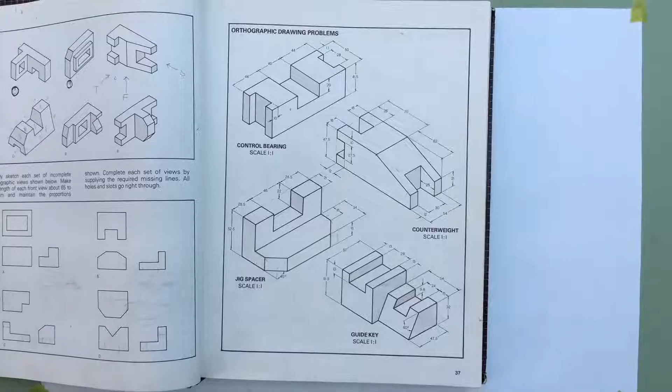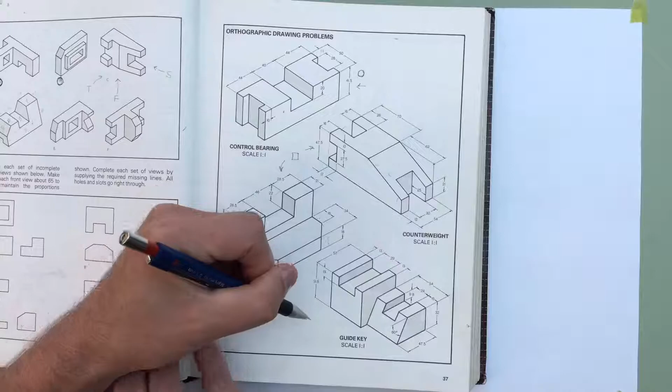Alrighty, so for those of you who ski, we have a few different options here for you. We've got the green circle, which is this guy right here, then the blue square for these ones, and then the black diamond one right here. The reason this one's a black diamond is because of this sloping face, which is going to make drawing it a little tougher. So if you want to stay in noob-friendly zones, you can choose these three objects at the top of the page.

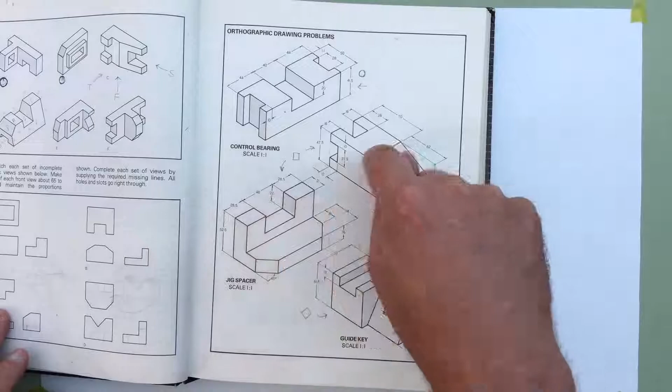But because we like drawing that's kind of sendy, we're going to do the black diamond on YouTube.

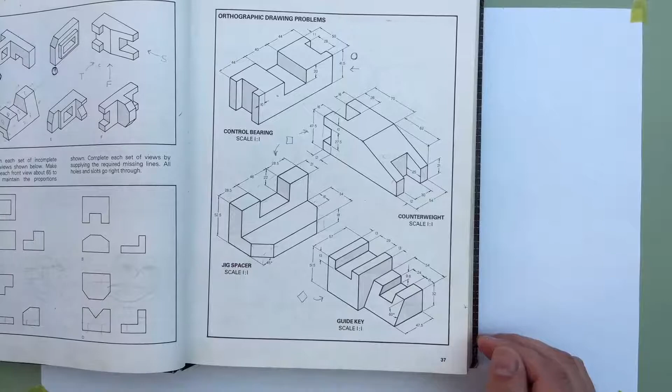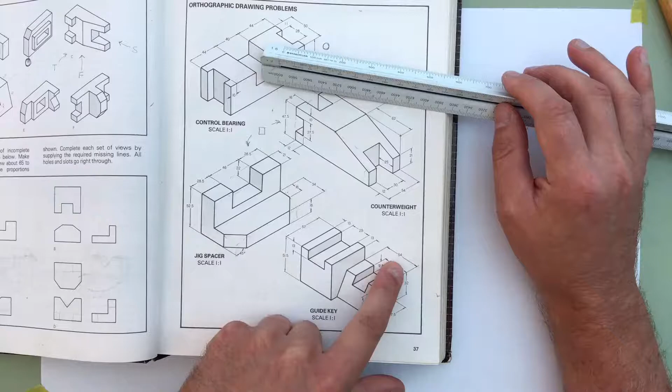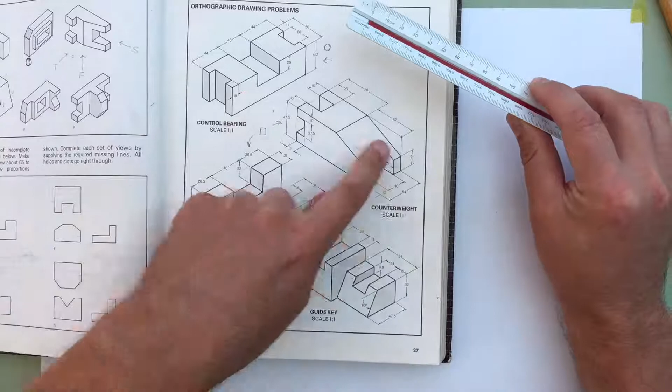And so here they're suggesting that's the scale you're going to use. So for these particular problems, we're just going to be drawing them at 1 to 1, we're not going to worry about scaling. But if I was laying this out on a sheet and didn't have guidance on what scale to use, I'd go to my scale, figure out how long the object is, and then see how that's going to fit on my sheet and how it's going to look.

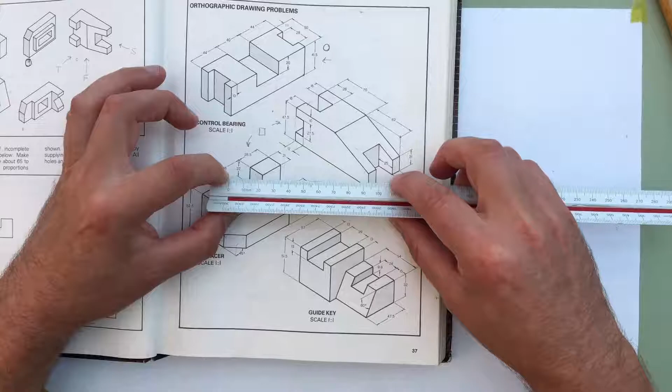So the next thing we've got to do is figure out what's going to be the top view, the front view, and the side.

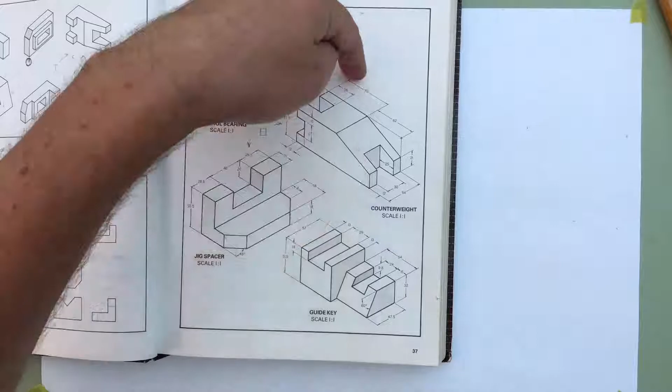So for all of these objects here, they've been organized so that the top view is kind of a gimme. In all of them, the top view is just going to be looking down onto these objects from above. And it's going to be the same for this one.

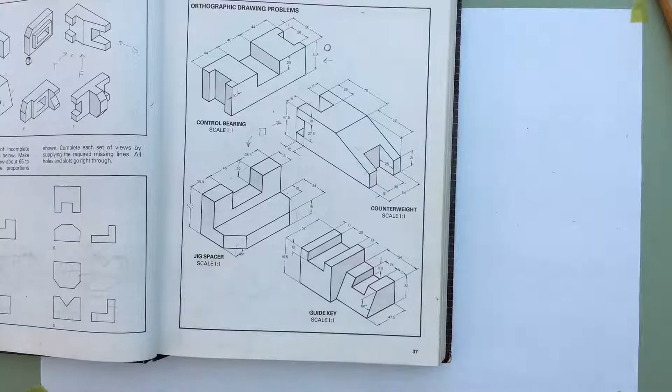Now the question is, when we think of projecting it, how do we want to lay this out on the sheet so that it's going to be easy to lay out? So I'm just going to very roughly sketch it out here before I go on to paper so we can just talk about this.

Okay, so I'm just going to draw this block very simplistically in the top view. So there's our block. It's got this sloping face at the front, which is going to create this kind of an effect.

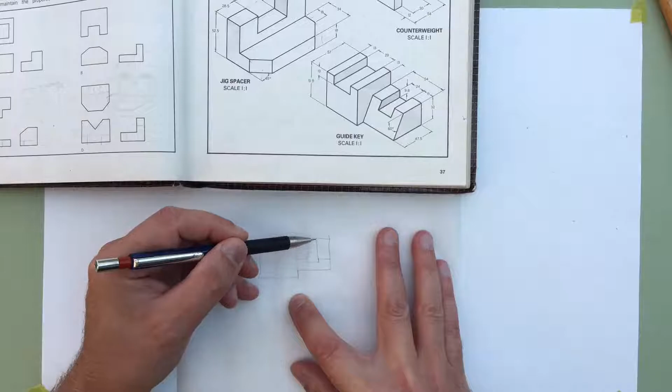So you can see the orientation that I've got it in here, that this is going to be my top orientation. And so as I draw the rest of this stuff, I've got to draw the view looking in this direction and the view looking in that direction.

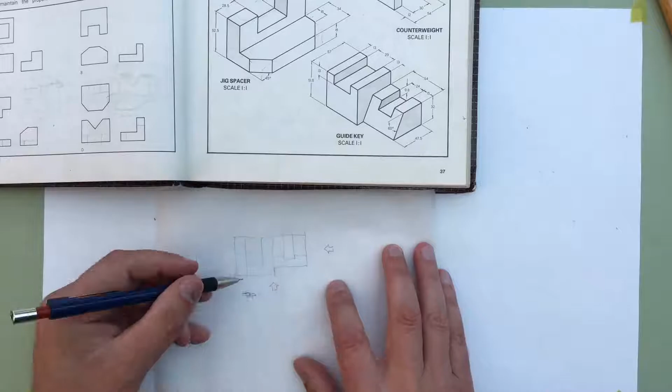So when I lay this out on the sheet, I'm going to start projecting some lines downwards until I get to draw what I need here at the bottom for the front view. I'm just going to draw some faint construction lines across so that I can start blocking out how this thing gets drawn for my front view. Then I'll come back in and do my object lines.

And this aspect of the drawing is pretty straightforward. Where it gets a little bit more difficult, you see with this sloping face that we see from the side—from the front view and from the top view, it's not immediately obvious that we have a sloped face to deal with.

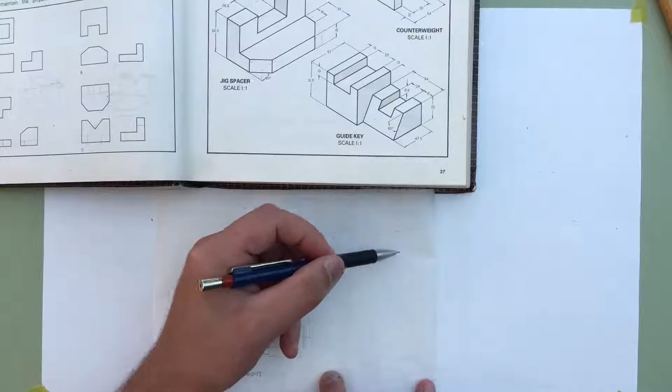So now what happens is we draw a 45-degree line from the corner here, and you can just pick a point here where that 45-degree line is drawn. And then you're going to start bringing these lines across and then bringing them down so that when we do the side view, all of our geometries are going to line up in two directions. So you'll be able to bring these lines across and then you'll start blocking this thing out.

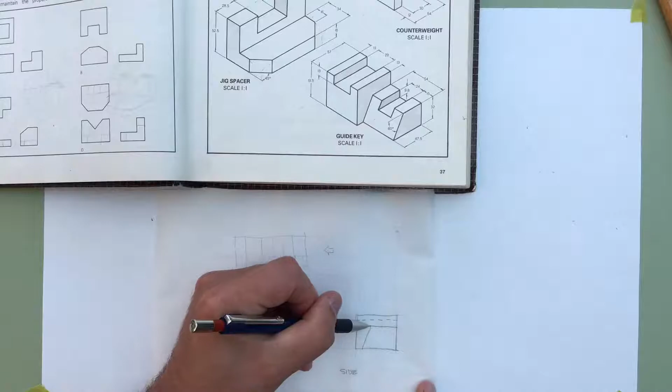So this taller piece here, when you see it from the side, we're going to see the dashed line coming across. And we're going to see the sloping face, which is going to start here and go back. And we're going to see the dashed line in here as well.

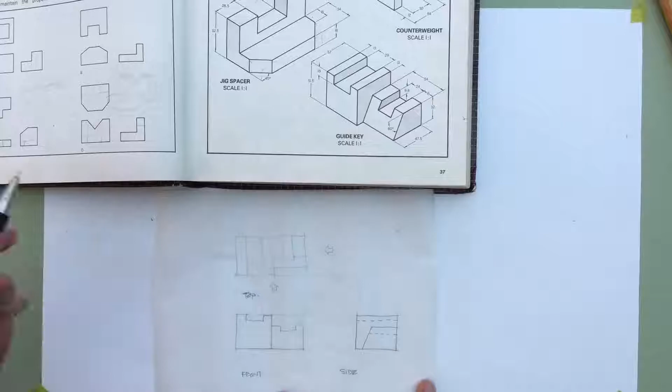Now, where people get confused on this particular block is when they're drawing this face. So what's actually easy to do is you can block out the top view first and just not worry about drawing this little bit of the sloping face yet, because it can be hard to figure out exactly where it is. So this is interesting.

This is how you can use other views to help you draw your top view. So normally you'd sort out your top view first, but these drawings are specifically ambiguous with how some of the stuff is going to be sorted out.

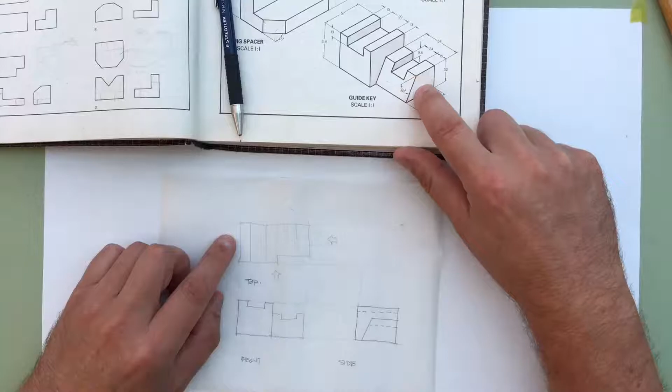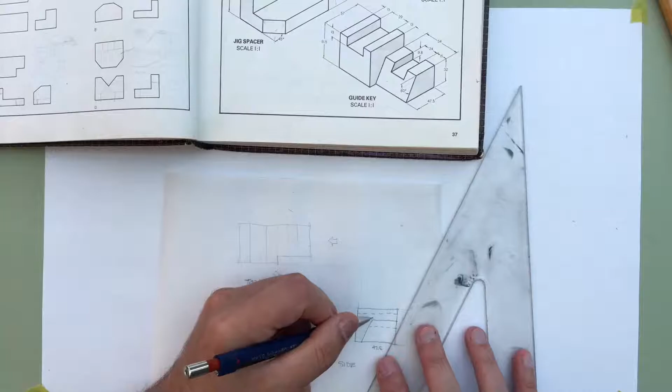So with a 60-degree angle, you know that you can come to the 47.5 millimeter mark here. And from here, you can use your set square and draw that 60-degree angle starting from this point and going up to draw that sloping face. So that's actually pretty straightforward for the side view.

But now, for where this slot comes through, we can draw these projection lines up to the 45 and then back over so that we know where the slot comes out on this sloping face. So now we know our slot comes to there.

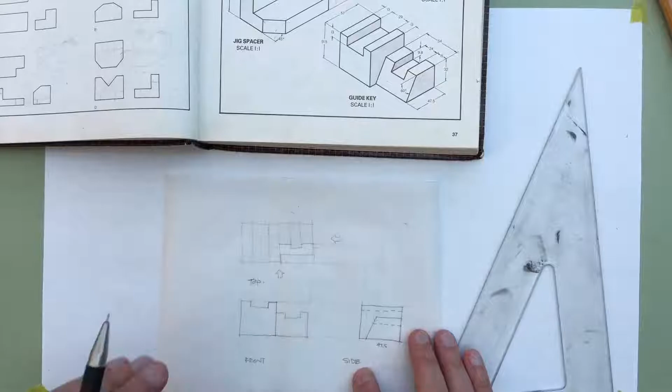Now for the top corner, we can project that line up and then take it over. And now we know where the top corner is going to show up in our top view—meaning that point right there. So this is how the top, front, and side are going to work out for this guide key.

So what I'm going to start doing is blocking it out on paper. And I'm not going to talk too much. If you guys ask questions, I'll answer them. But you can kind of see how I'm going to lay it out on paper, and you folks can follow along.

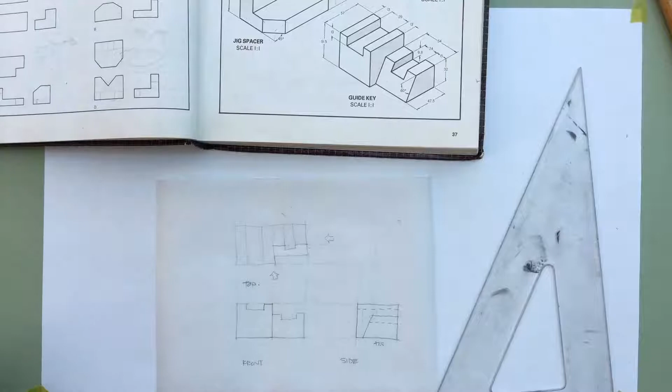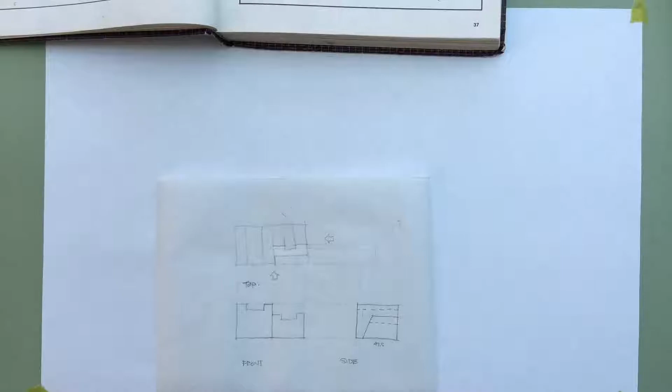So if you want to, if you guys want to start with the guide key, you can, just because that's the one that I'll be drawing, and we can all take the black diamond run together. Now we don't need the compass, of course, for this, so that's good.

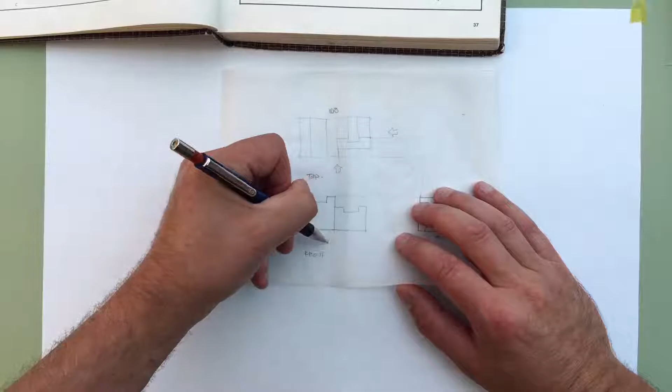So I'm just putting some of the overall dimensions on my sketch here before I get started. I'm creating a little roadmap for myself on trace paper before I get started.

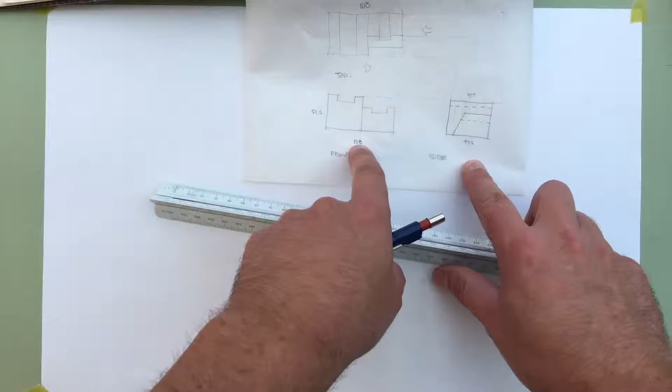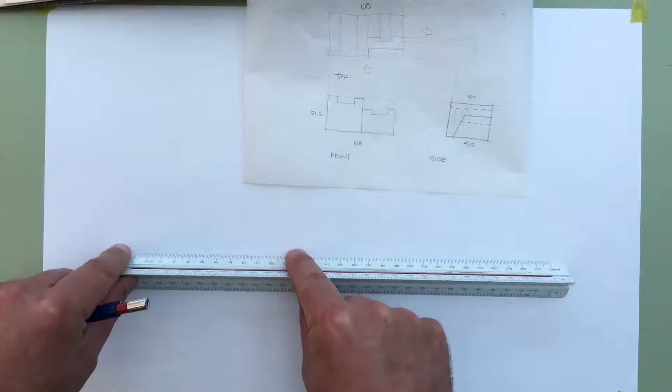Okay, so when I look at beginning to lay out the sheet now, I'm going to start thinking about how much room I'm going to be taking on the sheet. So I've got 108 mils, about 48 mils here. I want to start laying out my sheet so that I've got enough space for the title block at the bottom and so on. So I'm just going to lay my ruler out here. There's 110 there, and I need another 50. So I can start just about anywhere here and I'll be in good shape.

Whoa, my paper is totally not straight on the page.

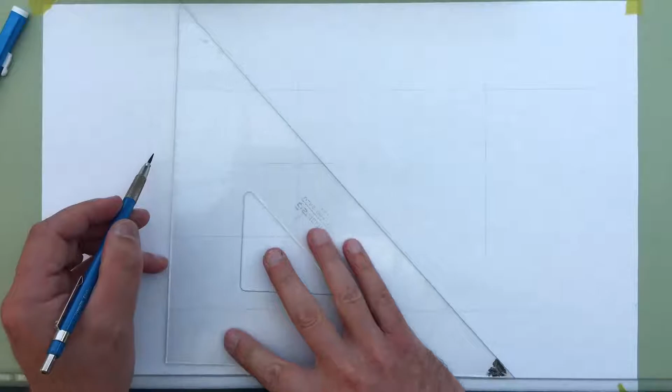Thirteen and 13. And then 15 and 15.

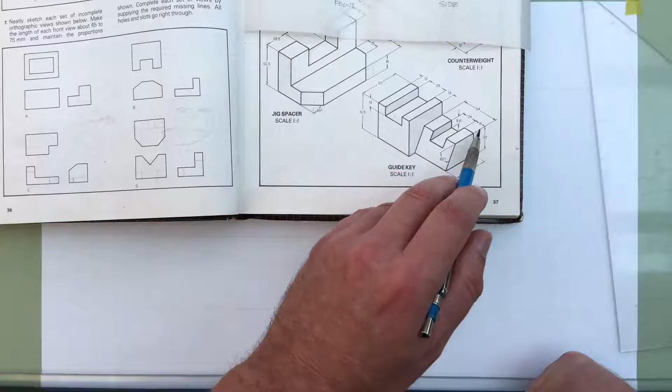So one thing that they don't show you in the drawings, see they've got a dimension here of 15 and then 24, and then they don't tell you what the dimension is on the other side. So you can work that out just with math. It's obviously 15 as well. So sometimes they deliberately leave out some dimensions on these things so you've got some stuff to figure out yourself.

Well, a lot of that's up to you. So what I did, I've got the two lines here for the side view, which are going to be 57 millimeters apart, because that's the ultimate dimension here, 57 millimeters. Oh, you still can't quite see it.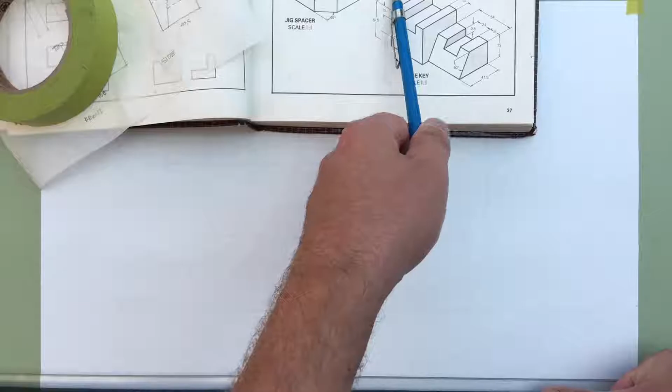57 mils apart for these two parts of the block. So these two lines on the sheet are 57 mils.

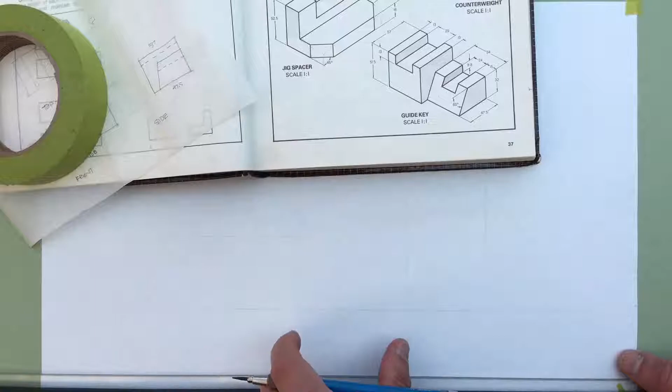Now the wild card is how much space you elect to put in between the drawings. Based on the fact that these are about 11 by 5, you probably wouldn't want to go much more than an 8 centimeter white space in between these two, because these are fairly small objects when we get them on the page.

Once we get into the more complicated drafting stuff, the amount of white space we'll have on the page to use is going to be a lot less, and so the gaps between our drawings is also going to be less. So when we're drawing something fairly small like this, we're balancing the white space around the page and in between the different views.

So I put an 8 centimeter space here, then started drawing the two sides of my side view. That's what got me my intersection point here where this 45 can start.

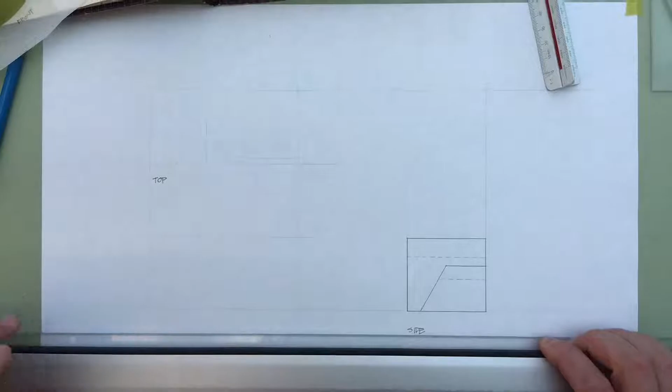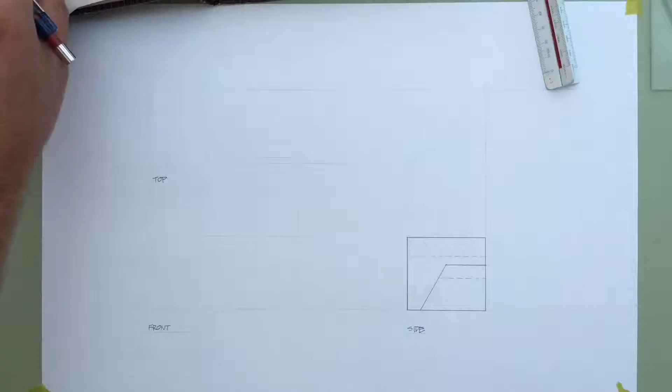Okay, so I finished my side view first, and the reason I've done that is so I can start drawing those projection lines like I was talking about earlier, so I could project some of what I've got drawn here up and over to my top view, to sort out what's happening here with these faces on the slanted edge.

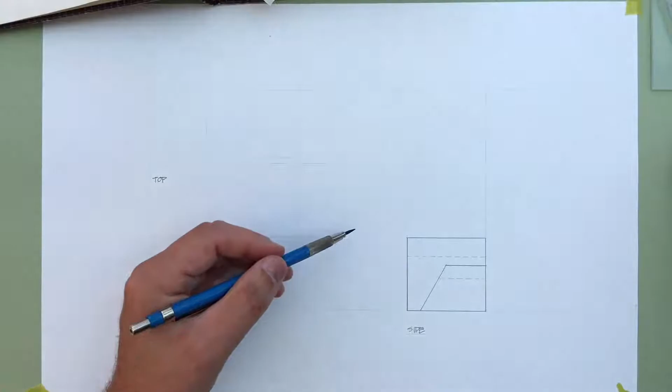So we're going to use that projection method I was talking about. I've got my 45 line here, hopefully you folks can see that fairly clearly on the stream. I could darken this up a little bit just to make it a little more obvious where that mirroring point is.

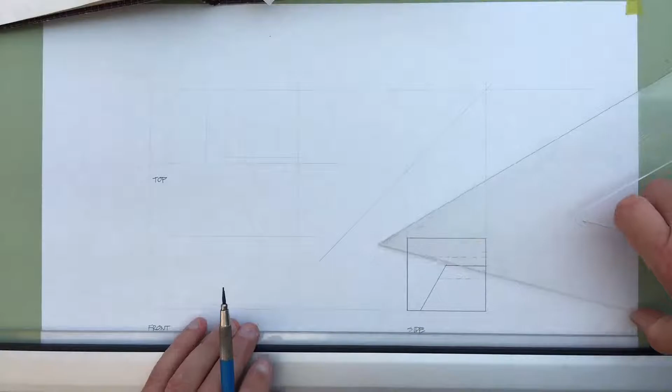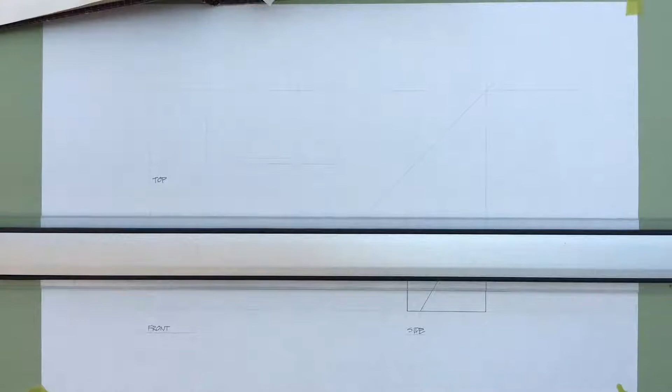What I'm going to do is first project the line upwards for this corner where the sloping face meets the top face on our side view. I'm just going to draw a real light projection line up, and don't erase these—keep these in your drawings. This is so that when you guys take the picture of it, I'll be able to see these projection lines because they do form part of the mark.

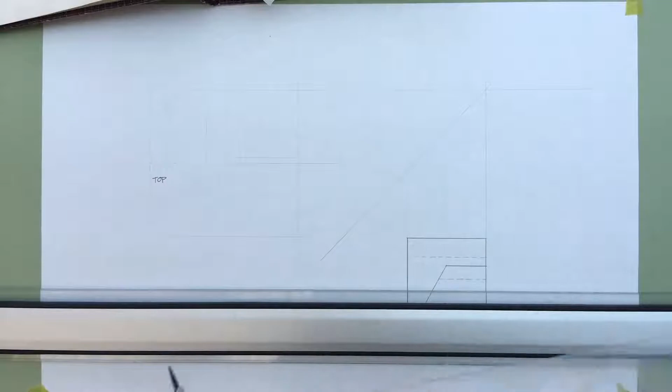Okay, so I bring this line over here, so now I can see where that top corner is. Now I also need to know where the slot exits the sloping face, so I've got to extend this one up as well.

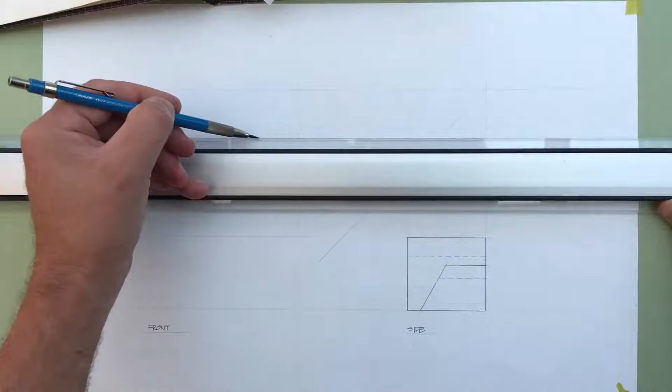Okay, so that gets me sorted on how to draw the top face. So I'm going to commit to it here and let it go.

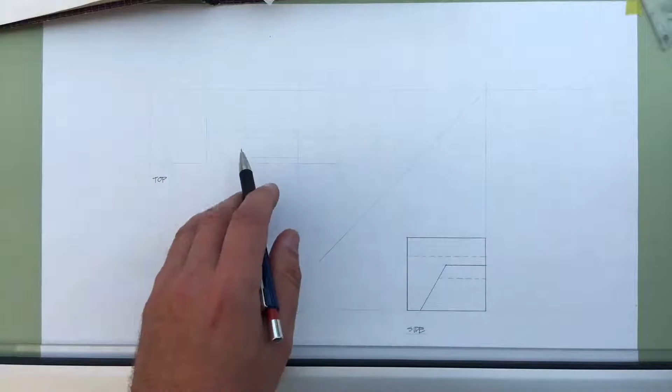Now we've also got our bottom corner here. I want to find out where that's supposed to sit. Although I think I already measured it here—I'm pretty sure, but it doesn't look like the right dimension.

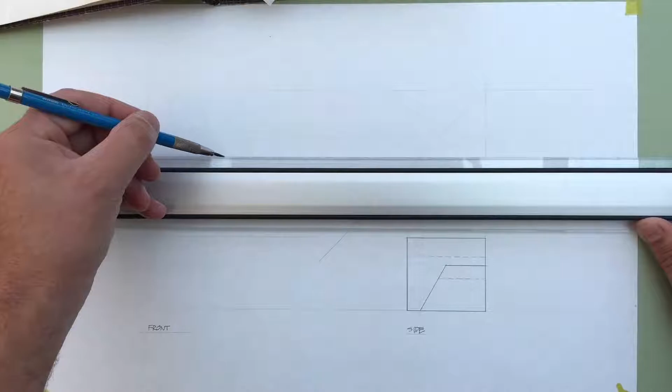Yeah, oh it is—oh, it was the right dimension. Okay, fine, all right, so here we go. I'm going to get my HB mechanical pencil here, and I'm going to block out my top view.

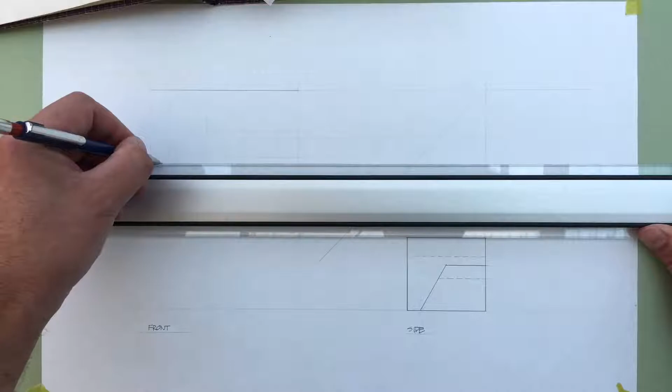Okay, and now to do the verticals.

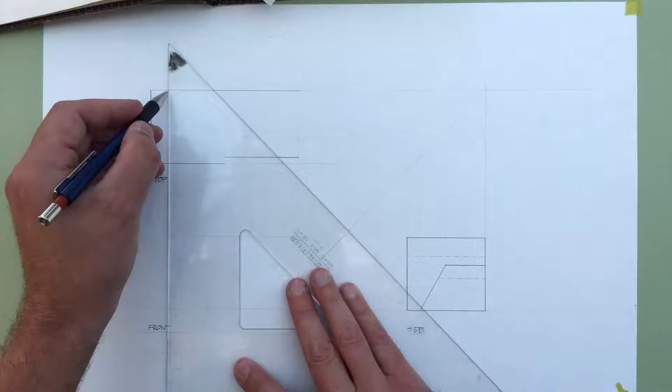That was a wasp who wanted to get in on the live stream, I guess.

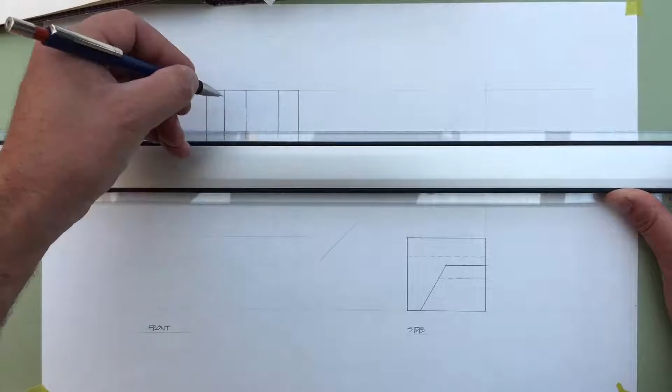Okay, so that's what the final presentation of the top view should look like. You can see how this bit of the line projects out a little bit farther, this horizontal line, than the ones above it at the top corner.

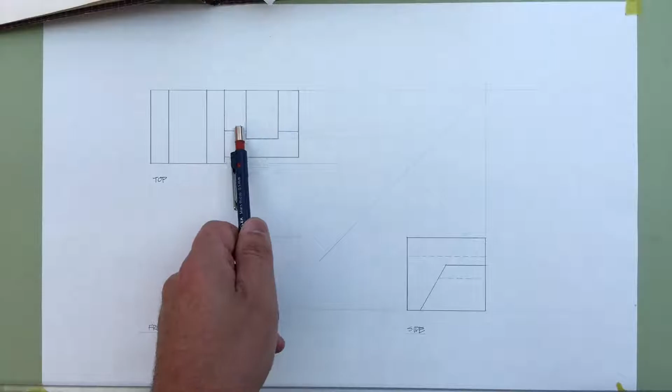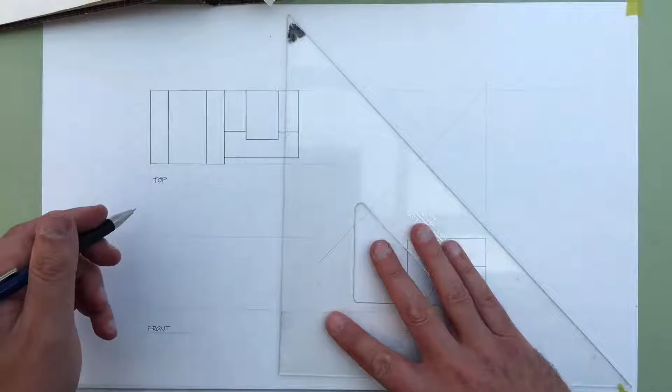Now I've got this one line here that isn't quite heavy enough, so I'm just going to hit it again. There we go. Also here, corners aren't quite touching, so I've got to get in there and see if I can improve that corner a bit. There we go.

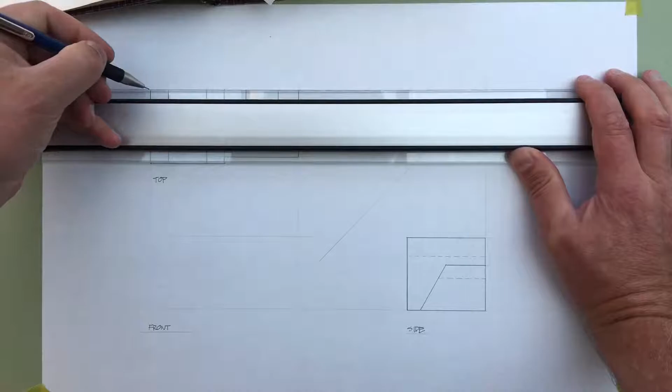You can see a few more places where the line weights aren't quite up to snuff here. Okay, so that's got it.